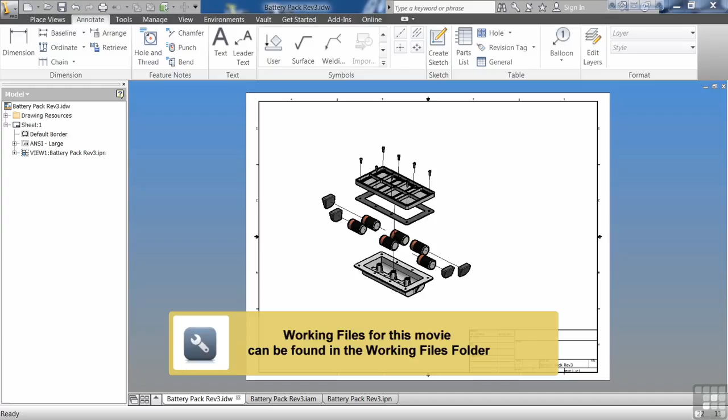In this exercise, we're going to be discussing the parts list. The parts list is very similar to the bill of materials, with the exception that the parts list is what's going on the drawing. This is what we're going to send out to the shop, to our customer, or out to the vendor for a quote.

To get started, we go to a drawing, then to the Annotate tab, and select parts list. Right away, Inventor gives us two different options. This may look like one option, but it's either asking us to select on the view or come up here and pick it out of this list.

This is what's open, or we could even go out here and browse. So we could have a parts list that didn't even have a drawing on the page. More than likely, you guys have seen this - a parts list where the entire page is one big giant parts list. Real complicated assemblies may even have two or three pages of parts list, so you don't have room to put the model on there. What you do is browse for the file. In this case, we have the model, so I can just select it.

And you can see that it can go through and change - do I want to have just the parts, how do I want to have it structured? This would be if I had a bunch of sub-assemblies, I could do something structured. In this case, I only have parts, so it really doesn't matter.

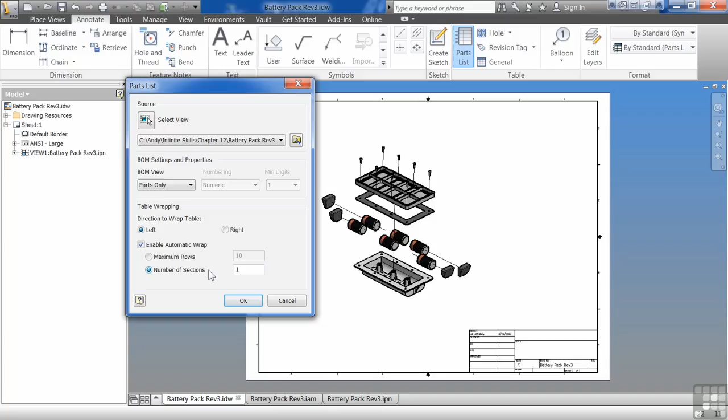I can decide which way I want to wrap the table. So if it keeps going and going, I can wrap it from left to right or right to left. Then you can enable automatic wrap, where it'll say okay, maximum number of rows or maximum number of sections. Maximum number of rows is probably the best one - you don't want it to be more than 20 rows long or whatever. We don't have that many parts, so we really don't have to worry about it.

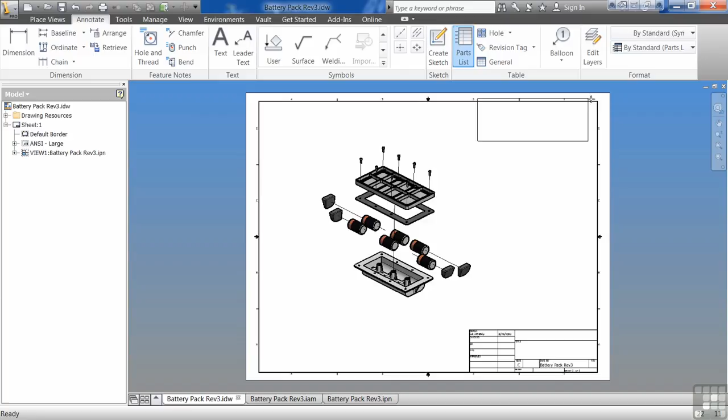You do have the option, if you say structured legacy, to decide what kind of delimiter you want - not really that big a deal. I'm going to say parts only. Let's say okay, and come up here and I can drop it in the corner if I want.

And I can see I get a really nice parts list. Just like the revision table, if I want to make it bigger, I drag it from right to left; if I want to make it smaller, left to right. So things like my item number, my quantity number - I obviously don't need those very big. Part number can get pretty long, so I maybe want to stretch that out a little bit. And then description can get extremely long, and I can come in here and tweak this.

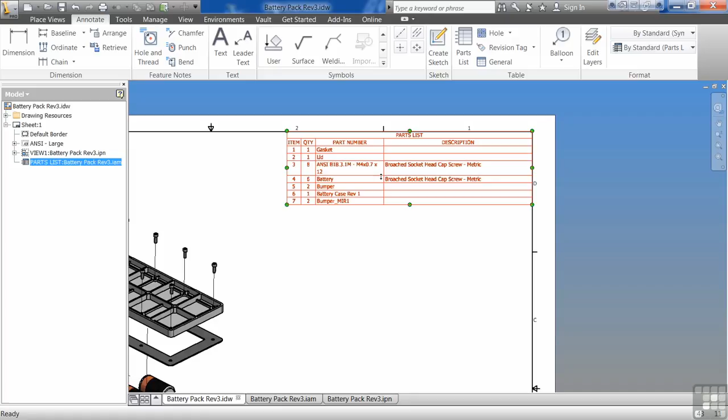I don't really mess with the style as far as the length or anything, as long as it has all the information I want. I can add different columns in here and see - okay, this is everything I want. I can come in here and add my descriptions now if I need to. These really should already be filled out in your iProperties of your parts.

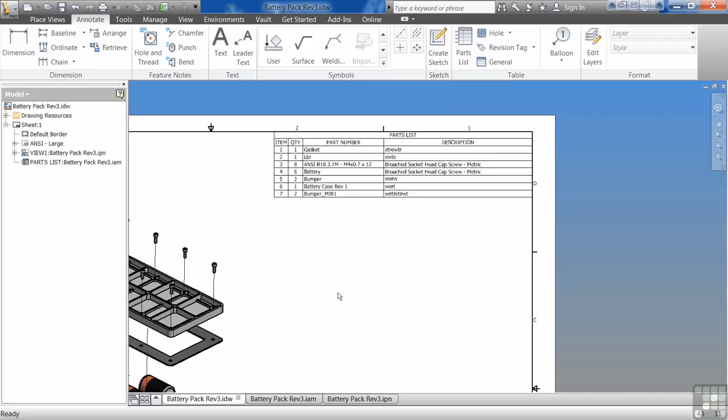So now I have my parts list in there. This parts list is based on this drawing or on this assembly. If I were to come in here and delete a part out of here, it would remove it out of the parts list. It's pretty easy to use.

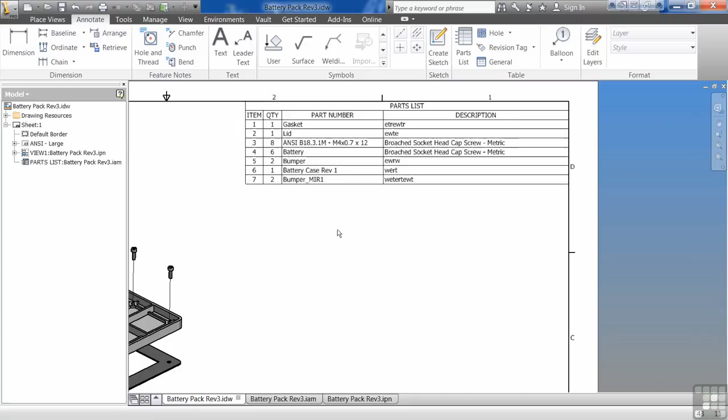So open up the Battery Pack Revision 3.idw, come up here, select parts list, and drop it on your page. Let's try to line it up in the corner here, snap it in there, and expand out your columns so we have enough room to read everything. You don't really need to worry about filling out the information - you can use the pre-filled out information. Just get them all in here so they'll fit real nice. And then we'll talk about editing the parts list in the next exercise.